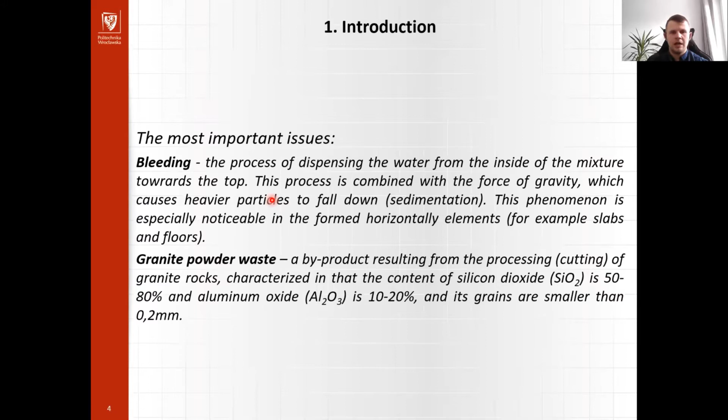Concrete is the most used building material in the world. Bleeding is a crucial fresh property of concrete used in concrete slabs and floors.

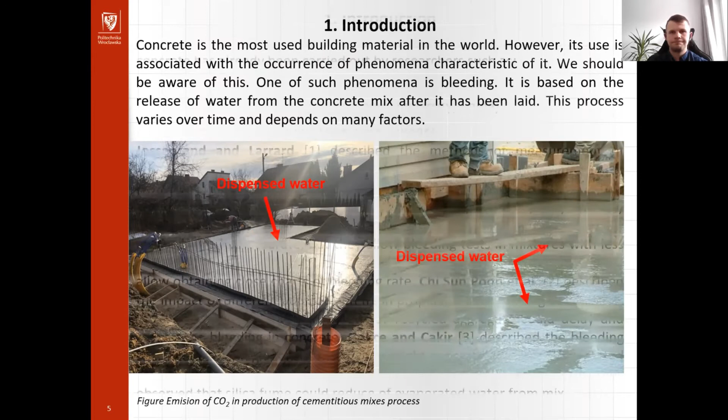Bleeding is a known topic. However, research related with bleeding often leads to different conclusions. Researchers are not convinced if bleeding is a homogeneous or heterogeneous process.

The pioneers of bleeding research include Jossenrand and Larrard, who not only defined the basic methods of bleeding research, but also the basic relationships related to it.

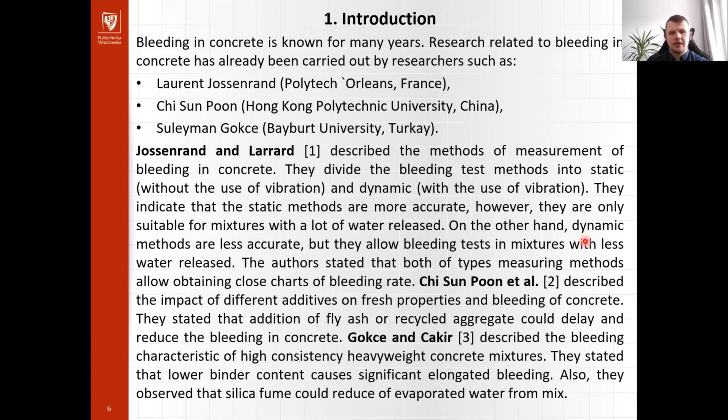Chi Sun Poon identified the effect of various additives on bleeding in concrete, and Gokce and Cakir extended this topic.

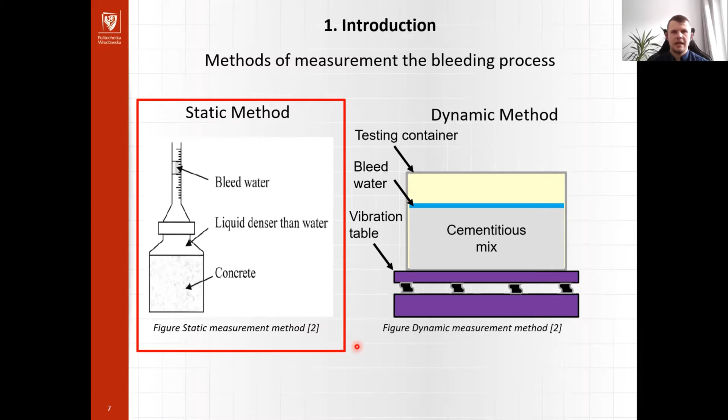Figures show the main types of methods for measuring the bleeding process. Based on literature review, it should be stated that the static method is more precise and often used in research.

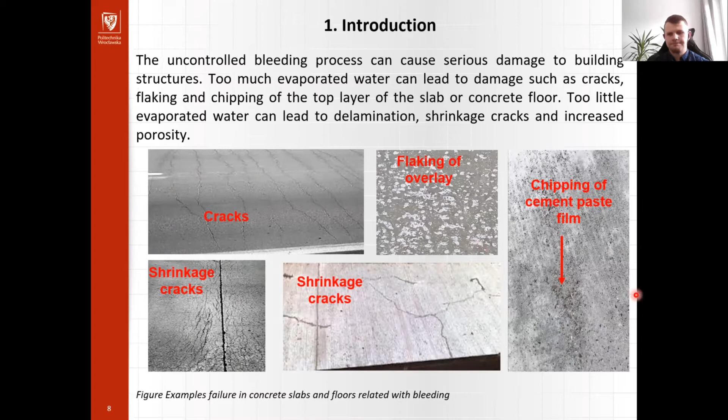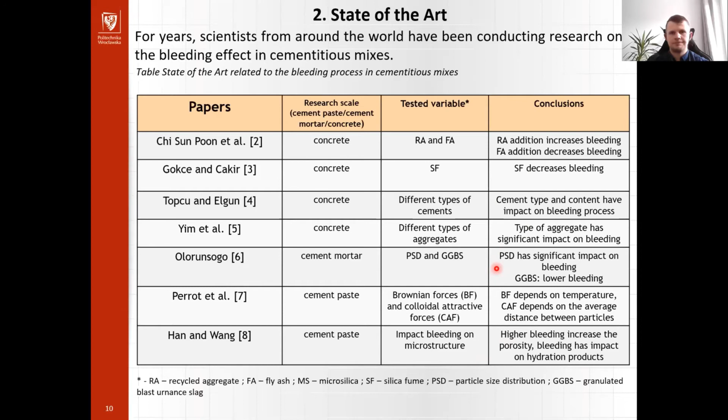Based on the state of the art, the following conclusions can be drawn. Bleeding is a heterogeneous phenomenon. Additives used by researchers have different impacts on bleeding in cementitious mixes.

Bleeding is a crucial property of fresh mixes in slabs and floors. Bleeding depends on the cement type used in research, and finer aggregate decreases bleeding rate in concrete.

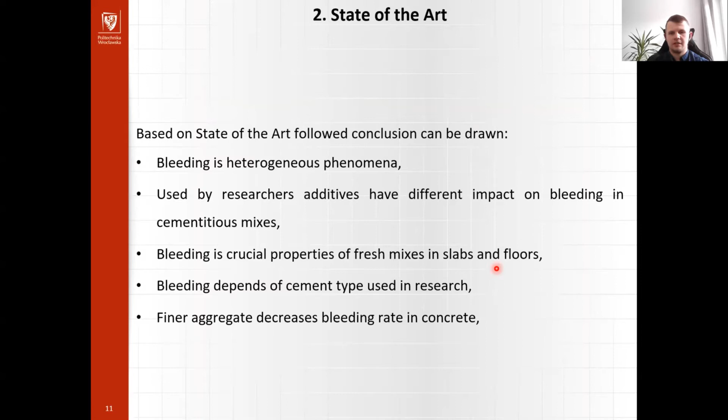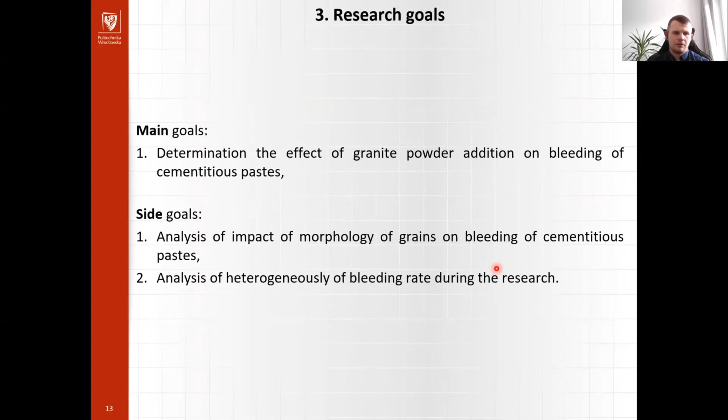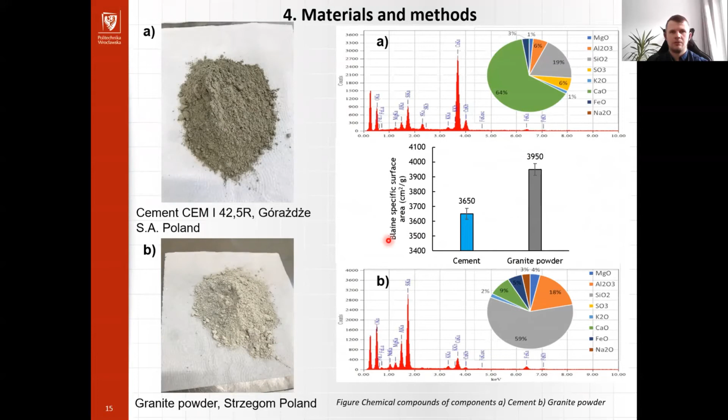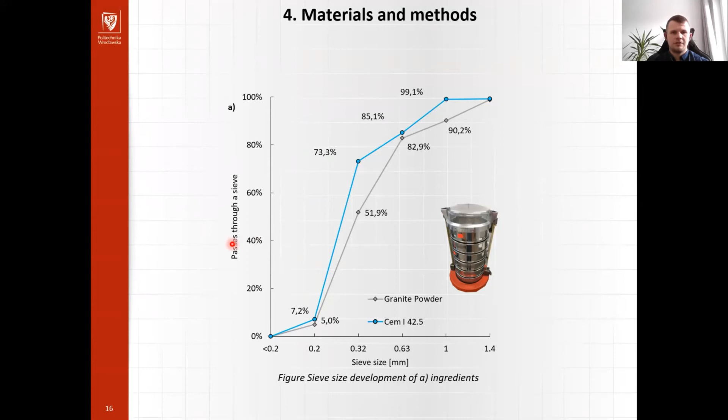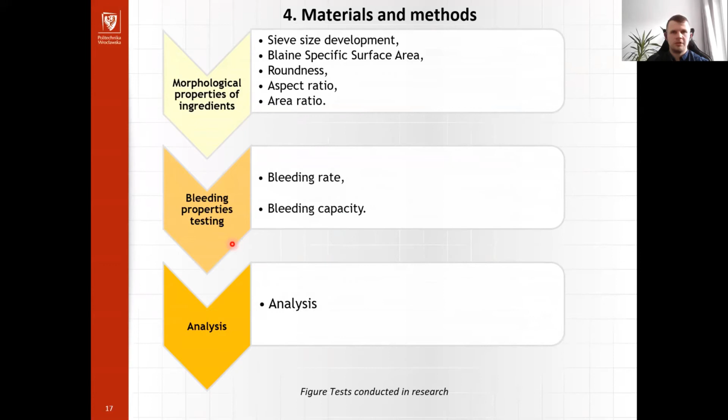Now I present the research plan. The plan consists of 3 parts: morphological properties of ingredients, investigating the bleeding process, and analysis.

To describe the effect of modification of cement paste with addition of granite powder, 4 mix series were prepared. The main research assumptions were a constant water-binder ratio,

a variable water-cement ratio, and testing every research series of cement paste at least 10 times for statistical evaluation of results.

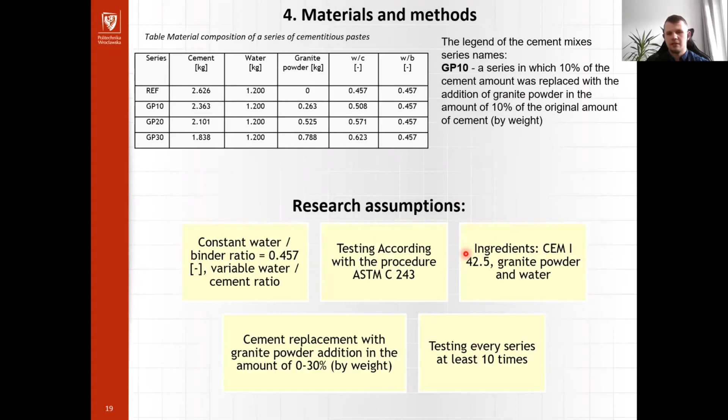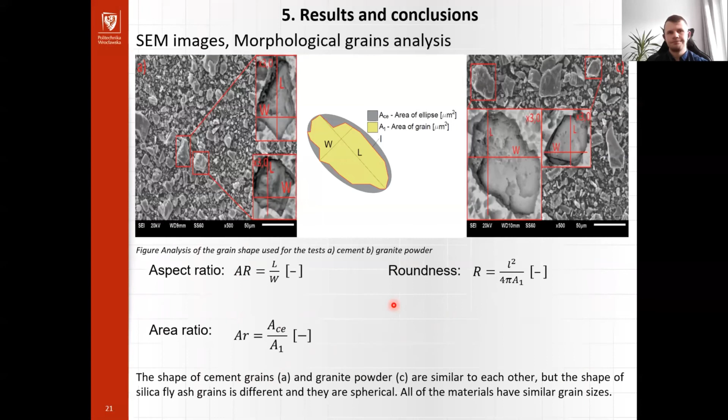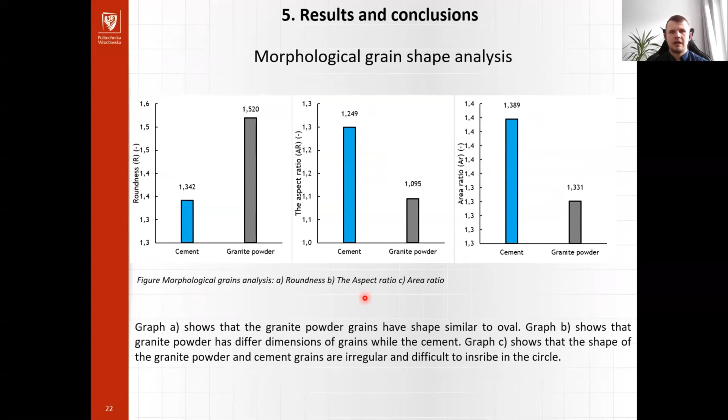Diagrams present the results of the morphological grain shape analysis. We can observe that granite powder has higher roundness compared with cement, and smaller aspect ratio and area ratio compared with cement.

The graph presents the volume of dispensed water over the total time of the bleeding process. We observe a clear impact of the addition of granite powder on the volume of dispensed water throughout the process.

Granite powder addition decreases the volume of dispensed water. Also, we can observe that the bleeding process is heterogeneous and changes over time.

Based on that, we proposed dividing that process into 3 phases. Phase 1, initial bleeding, almost linear and variable, low changes in each series.

Phase 2, accelerated bleeding, high volume of dispensed water, clear differences between research series. And phase 3, stable bleeding, almost linear and slight changes in volume of dispensed water.

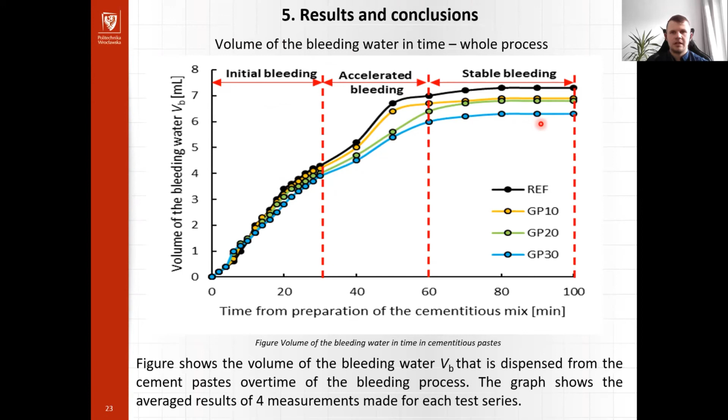Based on the results measured in the first 30 minutes of the bleeding process, we proposed another division of the first phase of bleeding. We can observe the start stage of the process, with the same results of volume of water for each series.

Stage 2, components ordering, could be connected with the impact of the mixing effect. That stage of bleeding is unpredictable and variable. And the third stage, appropriate bleeding, has stable changes in volume water process that could be predicted.

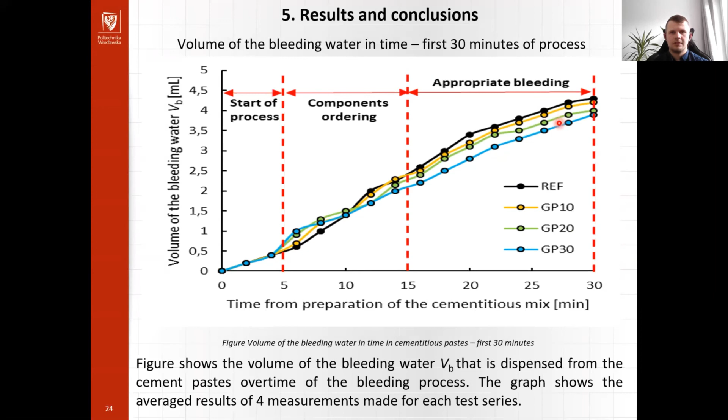The figure on the left side presents the results of bleeding rate for mixes modified with granite powder. The figure on the right side presents bleeding capacity.

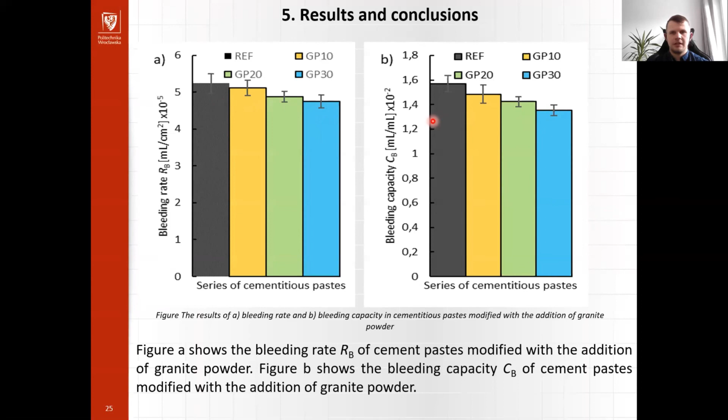It is obvious that granite powder decreases the bleeding in cement paste. Also, it may be stated that a higher amount of granite powder addition causes a higher decrease of bleeding rate and bleeding capacity in cement paste.

To conclude, it was observed that morphological properties of ingredients have an impact on bleeding of cement paste. The addition of granite powder reduced dispensed water volume by about 10%. Bleeding is definitely a heterogeneous process.

Based on the performed research, in the future we will propose a model of bleeding for cement paste, and we will investigate the effect of bleeding in cement paste on the early age cracking of composite surfaces.